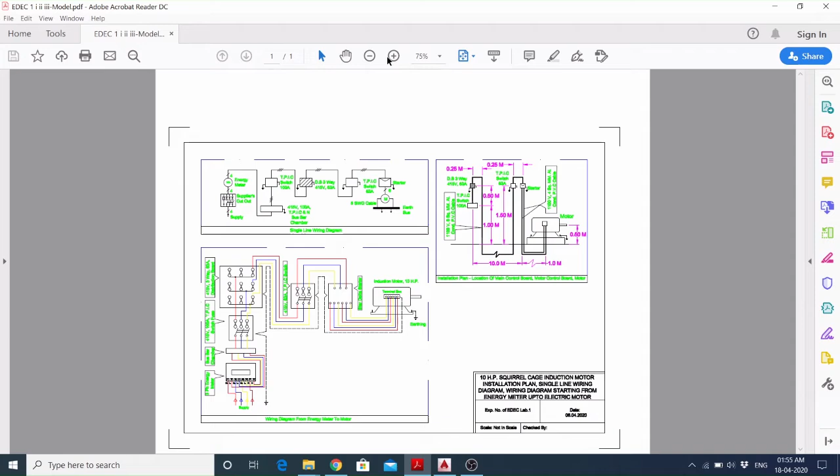Hello, today we will see how to draw the single line wiring diagram of a 10HP squirrel cage induction motor in AutoCAD. Here you can see the single line wiring diagram is already drawn, so we will draw it in AutoCAD.

In AutoCAD, first we will go to Format, then Units. The scale should be in millimeters, and it is already set as default in millimeters, so I will click OK. The shortcut command for units is UN, then enter. Now I will place it OK.

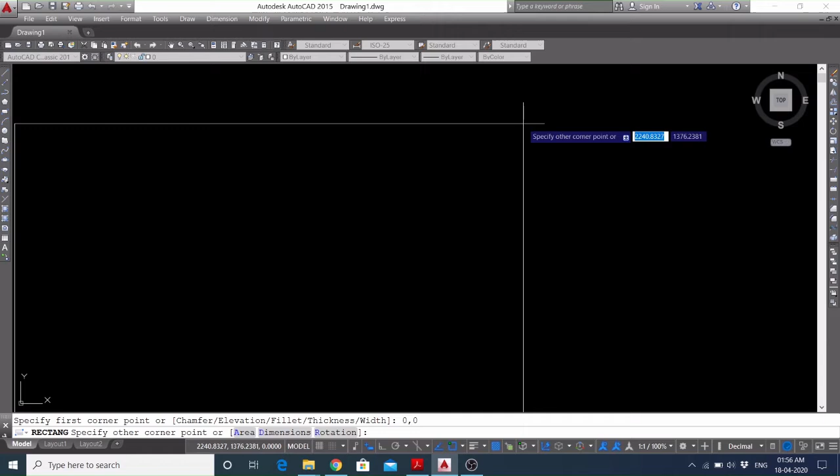Then I will take a rectangle from here, or the shortcut command for rectangle from keyboard is REC, then enter. Now it is asking to start the first corner point. I will mention the coordinate values as 0, tap 0, then enter. The rectangle has started. Now it is asking to specify the other corner point, or to mention the dimensions of the rectangle, so I can also click on dimensions.

Now it's asking for the length of the rectangle. I'll make it 297, then 210. That is the dimension of the A4 page in landscape mode. Now I can zoom it. I'll press OK to go outside the rectangle command.

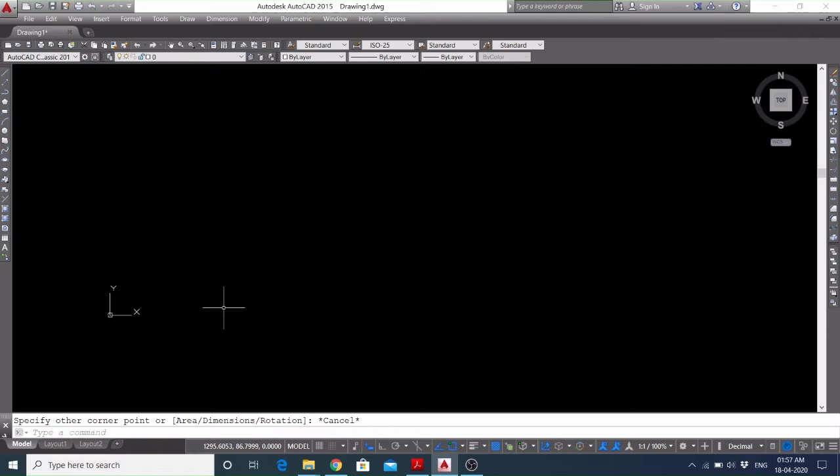Now I will once again take the rectangle command. It will start from 0, tap 0, and then I have to specify the other corner point like 297, tap 210. Now Z enter and A enter, I had already pressed to use the zoom all command here.

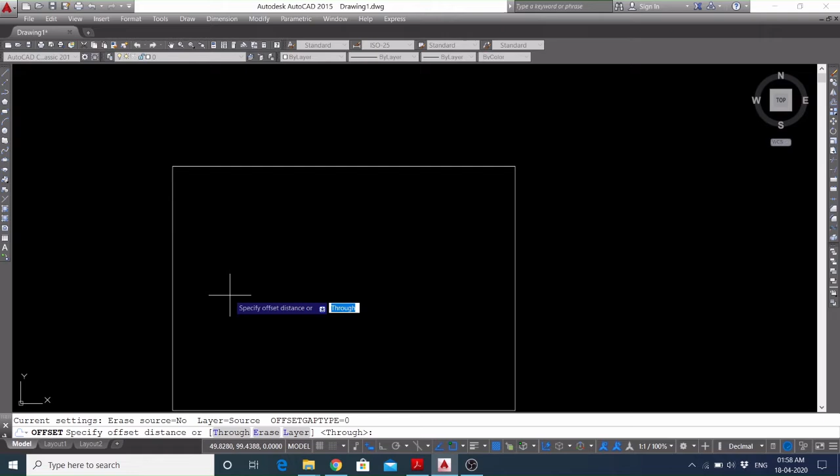Now I will offset it to make a margin. It is asking to specify the offset distance, I will make it 20 millimeters. Now it is asking to select the object to offset, so I'll select it and make it inside the rectangle.

Okay, now I will change the dimension. I will make it 10. Okay, then right click and enter. So the margin has already been drawn.

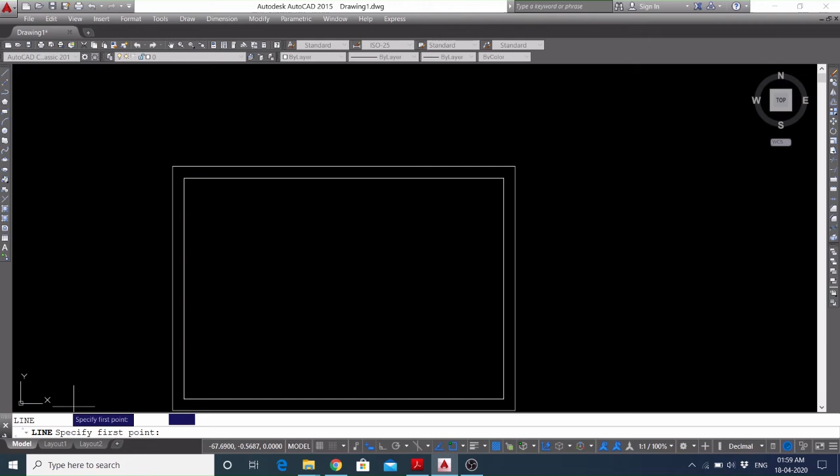Now I will have to draw this single line wiring diagram. This is a line as drawn here, so I'll take the line command, or I can use my keyboard, L enter, to start the line command. Now it is asking to specify the first point, so I will start from 50, tap 60, the coordinates.

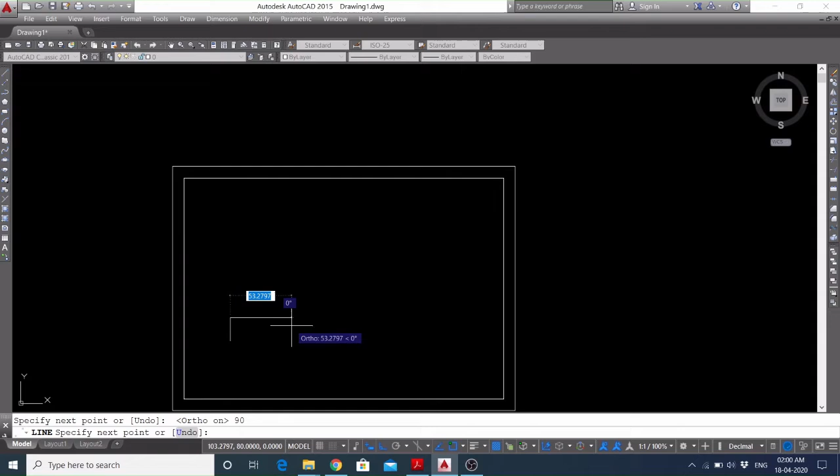So the ortho mode should be on from here, otherwise I can also make it on from keyboard, F8. Now it is asking to specify the next point. So I will make it 20 millimeters long at an angle of 90 degrees. Okay, now escape.

Here you can see there is an arrow to indicate the supply is incoming through this line, so I have to make an arrow. I can use different commands, but now I will use the polyline command, and I will specify the starting point over here.

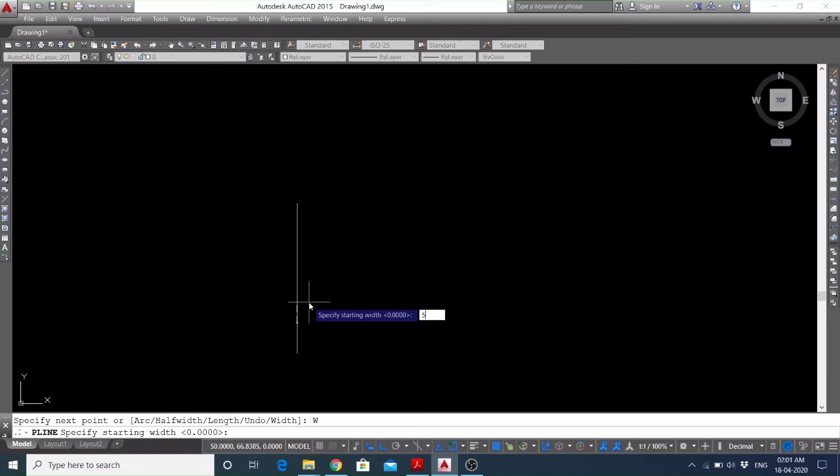Now it is asking to specify the next point or mention the width. So I will mention the width like 5. Enter. Specify the ending width to be 0 to make an arrow. From the mouse I choose the ending point of this line. Now I will use escape to go outside the polyline command. Now the arrow has already been drawn.

Here the other thing is there, like 1 slash, that means one line is there at an angle of near about 45 degrees. So I will draw it outside, like from here I will start and mention the dimension as 5 at an angle of 45 degrees, then escape. Now I will choose it and click on move.

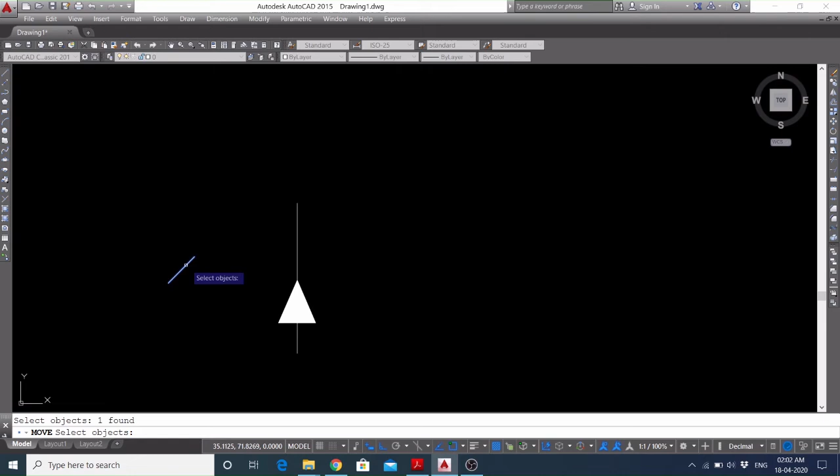The shortcut command for move is M enter. So I will place it from here to here. I want to place this line here, but the midpoint of this line should be placed on here. So I will take the move command. The object selection is done, then enter.

Now it is asking to specify the base point, so I will not click on here, then it will be difficult to place, and the intersection point will not be the midpoint of this line. So I will pick the midpoint and then place it here.

This line which lies in the 45 degree plane basically means that there are some cables or lines there. So how many lines there are, I have to mention with the numeric figure beside the line. So here I have to put the numeric figure.

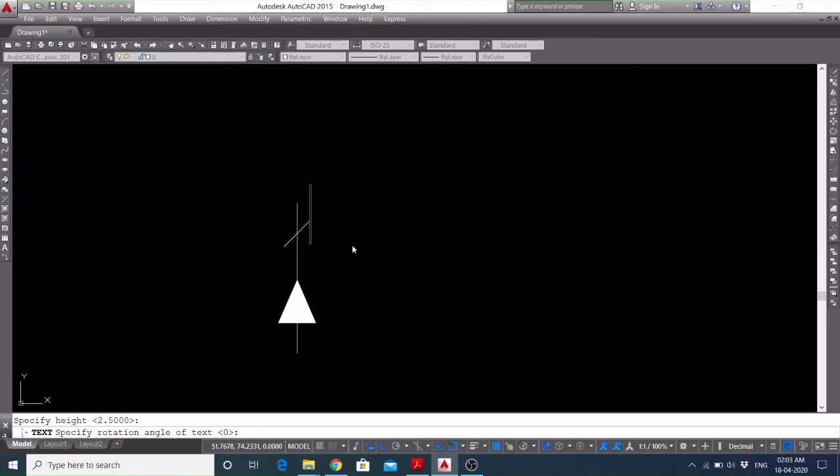I'll put 4. Okay, this is rotated. I will undo it, and then again I will take the text option from the draw toolbox, here, then here to here, 4.

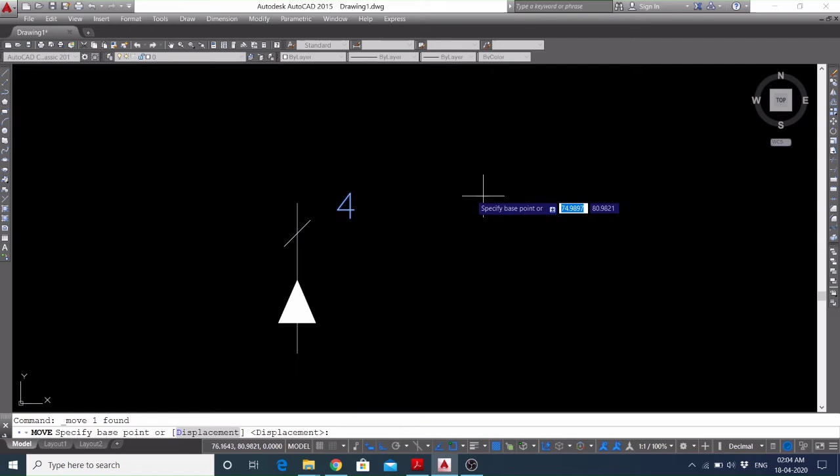Okay, this 4 means there are 4 lines, which is drawn with a single line, as this is a single line wiring diagram. So I will make a line only here, but there are 4 lines I have mentioned like this way. This is a standard rule.

So after that I have to draw a rectangle over here, within which some figures are there to schematically draw the supplier's cutout. So I will take a rectangle from here to 20, tab 10. This would be the dimension.

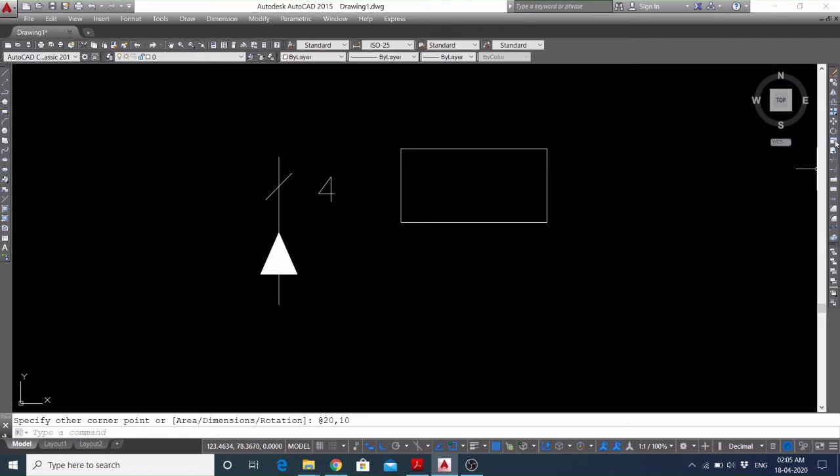I will use the scale command to make it more larger. The object selection is done. Now it is asking to specify the base point. What will be the base point? So I will choose from here.

So it should be 1.5 times more larger, so I made it, and put, by using the move command, I put that rectangle here.

So under this rectangle there should be, this figure should be there. There are 4 lines and like this way.

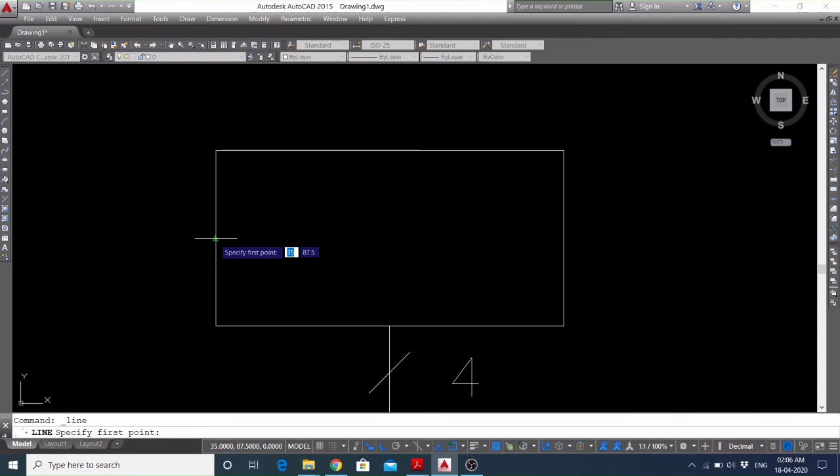I will draw a line here. Now I will use divide command, Div, divide. Object, select the object as selected. Now it is asking to enter the number of segments to draw the 4 lines with an equal space. So I will use 5 number of segments. Segment is 5, then enter.

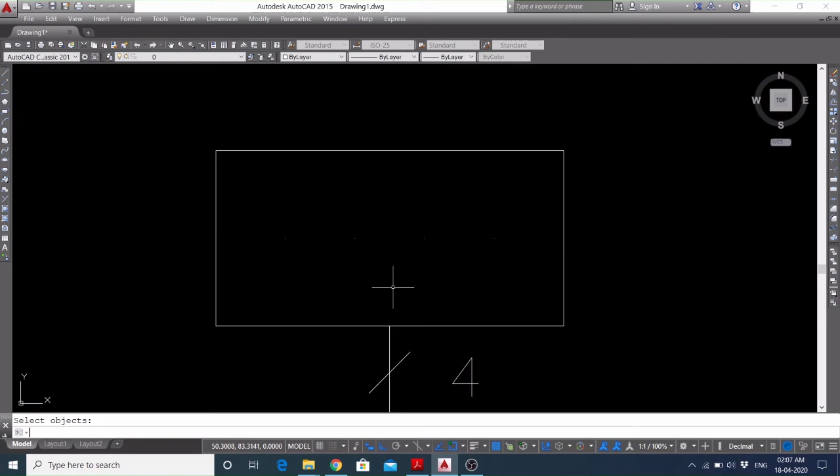Now if I erase this line, you can see that there are some nodes there. I will use this node to draw the lines.

Extend this to, enter. Now I will copy, the shortcut command of the copy is CO, then from here to this node, you can see that the node is highlighted, so like this. Now I can erase these nodes. See what happened here, that these lines are equally spaced.

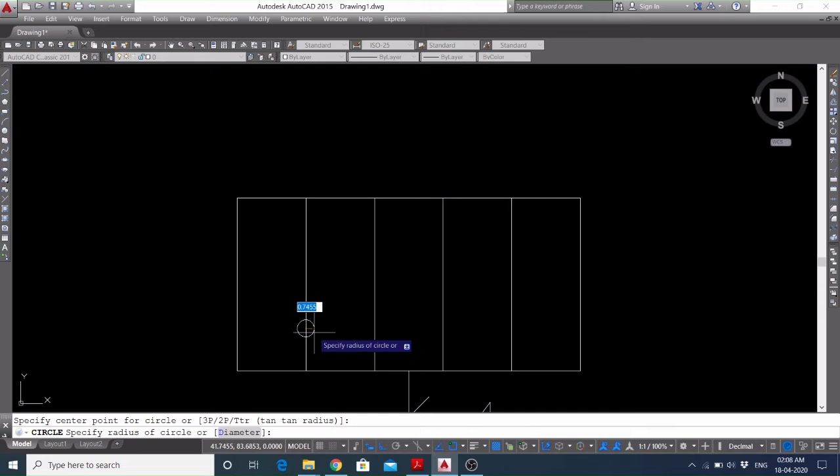Now there are 4 circles, small circles are there, so I will make one circle like from here. What will be the dimension? Now they are asking to specify the radius of the circle, so I will make it as 0.8.

See, it will be visible. So I will place it. I had copied, the copy command is started. So it is asking to specify the base point. So object selection is done, so it is asking to specify the base point.

I'll choose this one to make it easy to place the circles. So specify the second point, this would, and then this one, and then this one. So I have to trim. TR enter is a shortcut command, otherwise you will be able to find out the trim command from here.

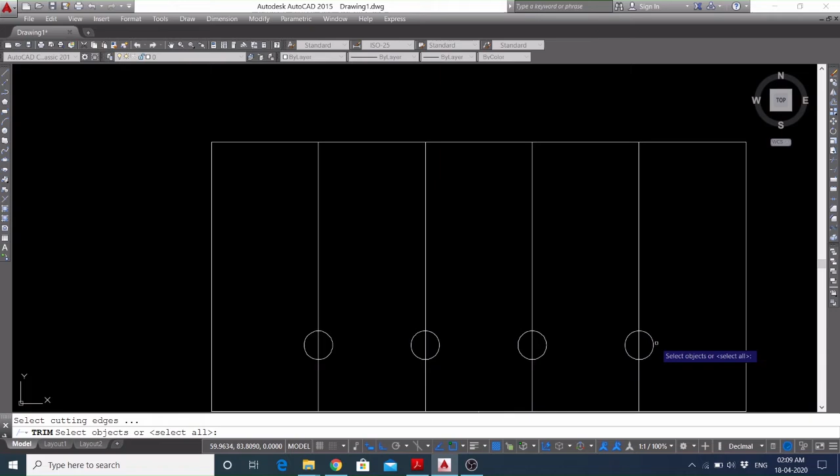So the circles should be selected, then centers be here. Enter. Then there are 2 circles. So I will just copy.

Selection, copy, from here to here and here. Okay, so I will again use the trim command from here to here, then yeah, okay, again trim.

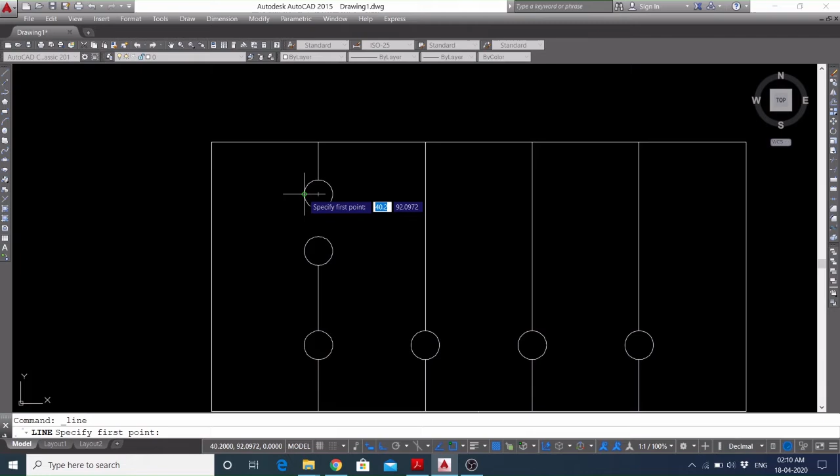Now I will draw the line from this quadrant to quadrant, again quadrant to quadrant. Okay, fine. Then the same circles.

Copy, base point should be here. Then if I choose here, then also I will be able to place here, right here to perpendicular to this, then perpendicular to this, and then perpendicular to this.

Okay, see, if I choose this copy and then from here, then I will not be able to place in proper location. Okay, see, I will not be able to place at the center. This center point of the circle will not be placed properly on this line.

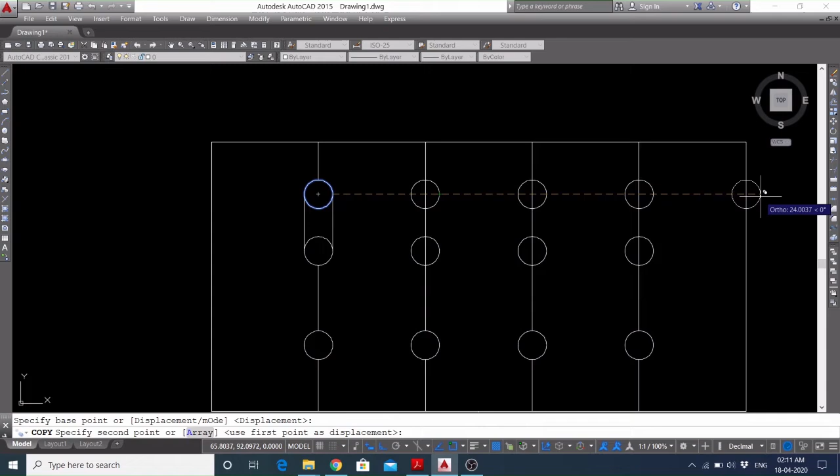So whenever you will move or copy, or whenever you will draw something, you have to keep in mind what would be the best base point to move or copy or to use the commands.

Okay, so again I will use trim command here. I will choose from here to here. Okay, so this and this.

Okay, this is a single object, so I have to use erase command. Trim command can only be used with a reference point, but the line was here, right? So there are no reference point to trim, so this is a single object, so I have to use erase command. Now I will draw the line, but from where?

I will use tangent. So TAN, enter, again TAN, enter. Tangent to tangent of those circles at the first point and the end point of this line.

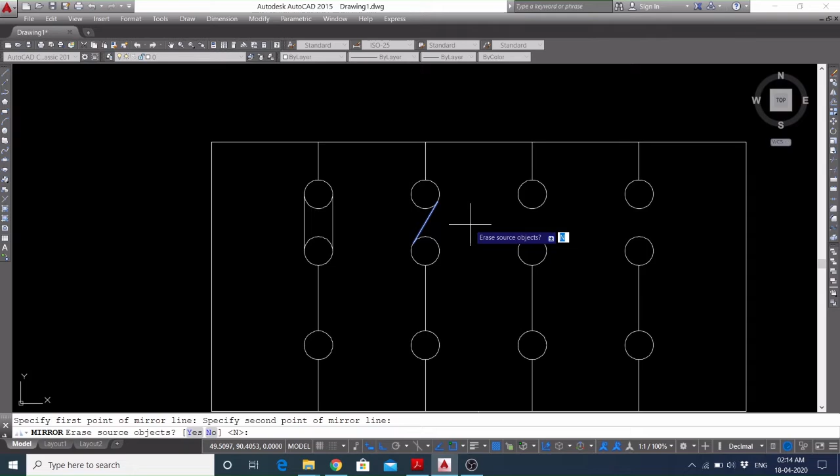So this will be the first point of the mirror line, and this will be the second point of the mirror line. Now it is asking to erase source objects. No. Then enter. So both lines are there, so I will use copy, then from center to center.

So the lines are drawn. Now I have to place this switch, to make this cut out I have to draw these lines, so I will erase these lines. I will not erase this line. I will erase these two lines.

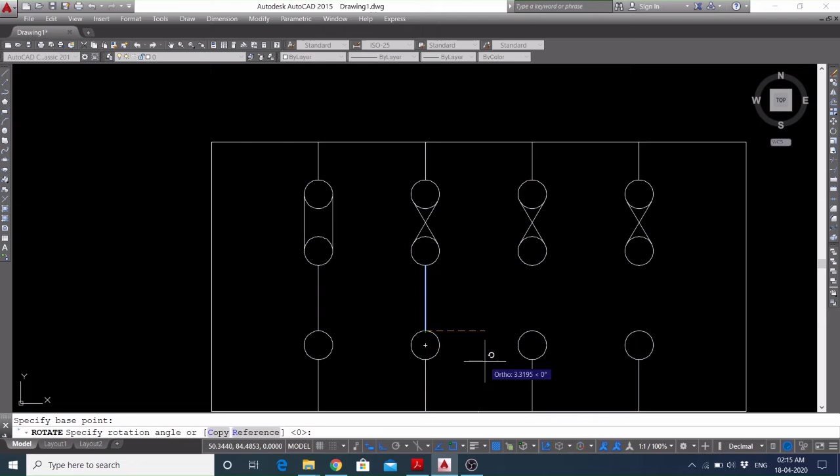Now I will use rotate. The object selection done, then right click, then specify the base point. The base point is this one. Now what would be the angle? Minus 45. Enter.

Now I will copy this one from here to here, then now I will draw a line from midpoint to midpoint.

Then offset, distance would be 4 millimeter. Okay, 4 millimeter is quite high, so here I have to use 1. Enter. That is also okay.

I will use this one, then 0.5, then object selection here. I will use extend. Trim.

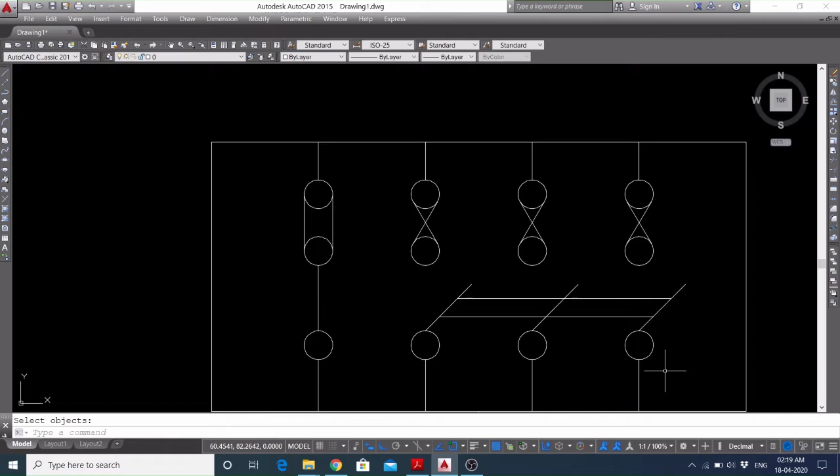Now I will erase the middle lines. So this is drawn complete.

Again in this one I have to copy. I'll use the move command, pick the center point to the midpoint of this, midpoint to midpoint of those lines.

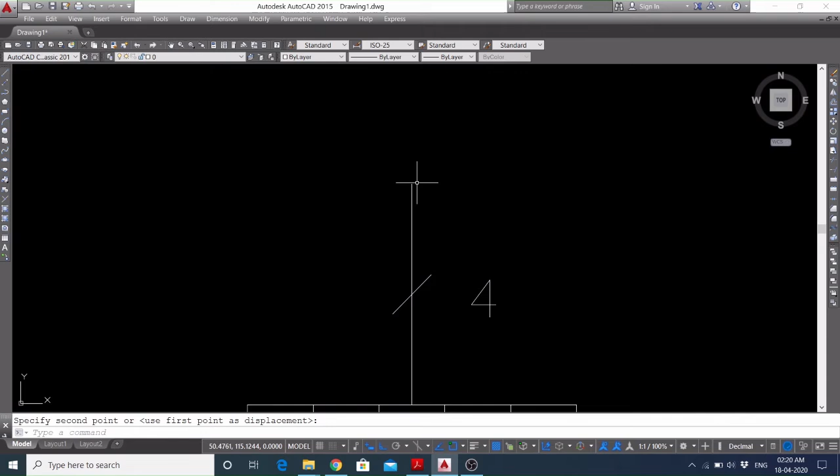So now I have to draw a circle, from here I will take the base point so that it will keep it aligned with the center point, aligned with this line. The radius of this circle would be 10.

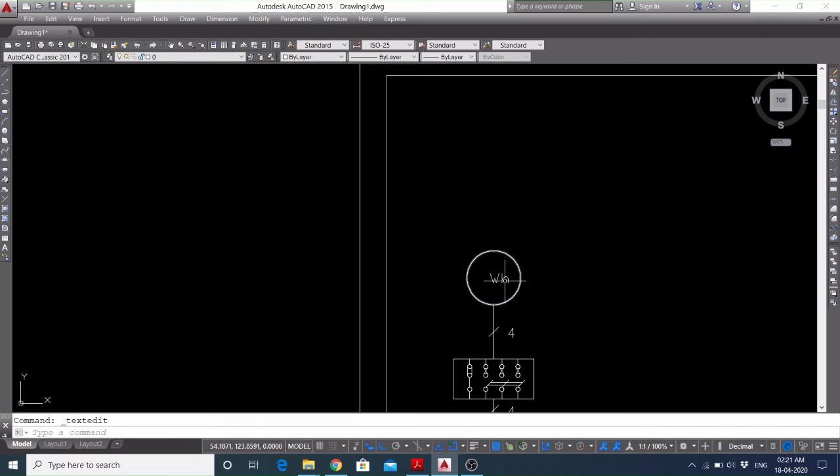Move command here, then again the same thing is there. That means the 4 cables are going from here to there. Output of the energy meter, there are also 4 cables, and input at the energy meter is also 4 cables. So then it will run, and then it will drop to the bottom, and then it will enter here at the TPIC and neutral.

Triple pole ironclad, TPIC, the full form of TPIC is triple pole ironclad with neutral. So 4 lines should be there. These 4 lines mean 3 phase wires and a neutral wire. This bus chamber should be drawn.

I will just make a copy of this and keep ortho mode on, so I will just place it over here, then from here I will randomly draw.

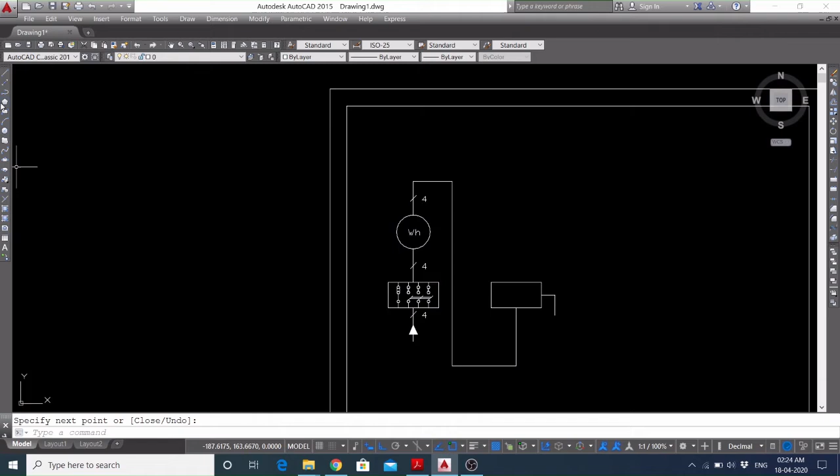So I have to draw the earthing. Go from here to here, then I will copy this line from mid to this, then.

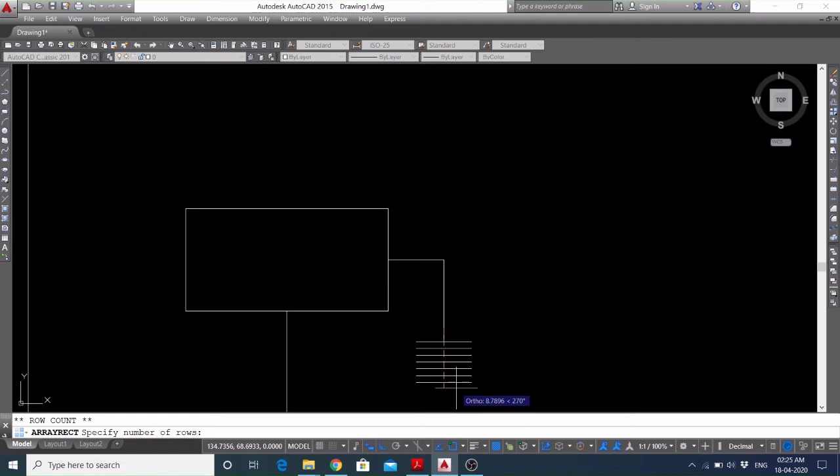Rectangular array, select object, enter. The number of columns would be 1. Direction would be like this.

Then enter. Now I will draw the 2 lines, then trim, enter. Fence, I will take the fence command and draw an imaginary line.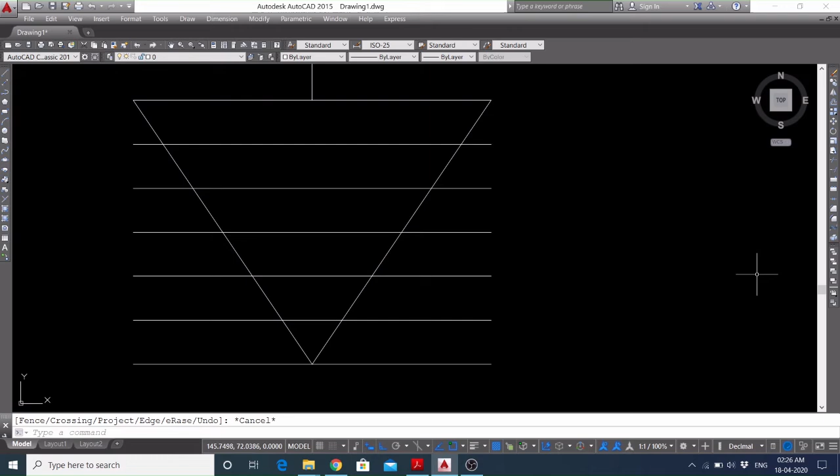Sorry, the trim command will not work over here because now these 1 2 3 4 5 6 7 lines are treated as one single object, so I have to use the explode command. Explode command is already used, so all the lines are now separated. So I will use trim, then fence.

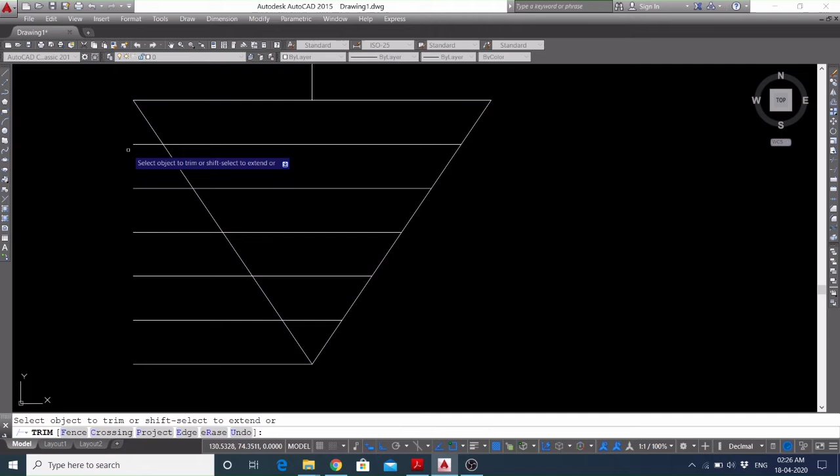Now using this fence command, it automatically takes all the lines which are there with the imaginary fence lines. So whatever objects are there when the fence lines are drawn, all of those will be trimmed. And now I will use the erase command, again to erase these things.

Okay, now from there just copy from there to here.

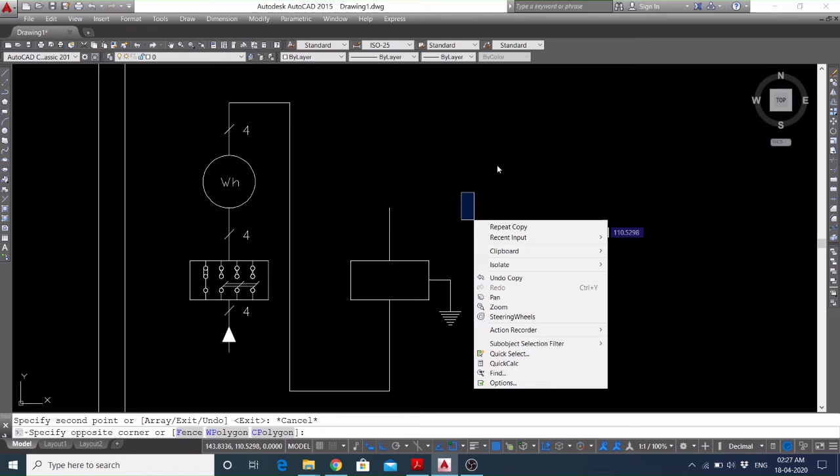So you can see that there are 3 lines placed at an angle of 45 degrees to indicate that there are 3 phases, or you can say 3 cables or 3 wires are there. So you can either mention it this way, or you can mention it like this way.

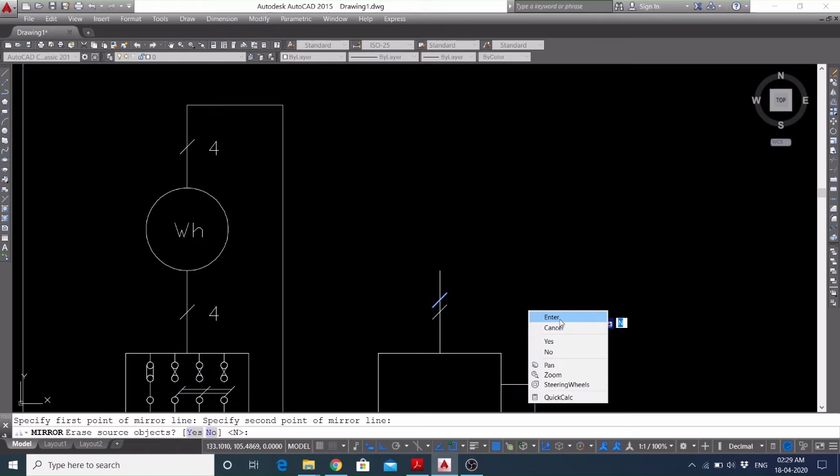So I will just copy it from here, then here. I will copy it once again from there to here, and then mirror. Now the TPIC switch box.

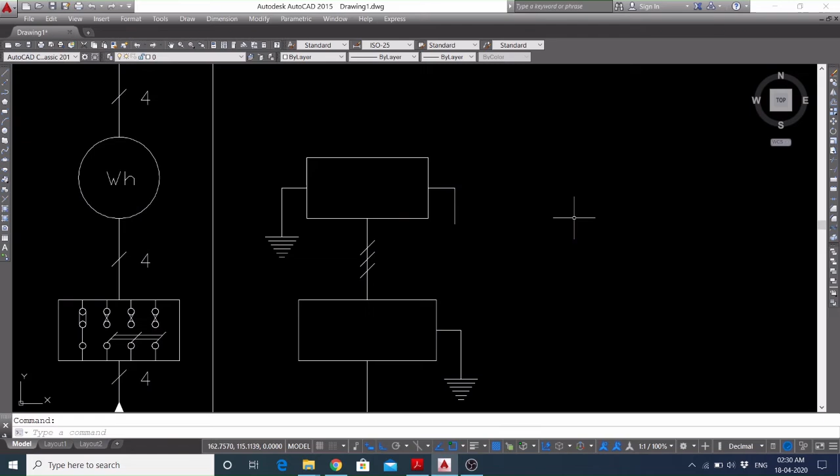Okay, I will save it now. Desktop. HP induction motor.

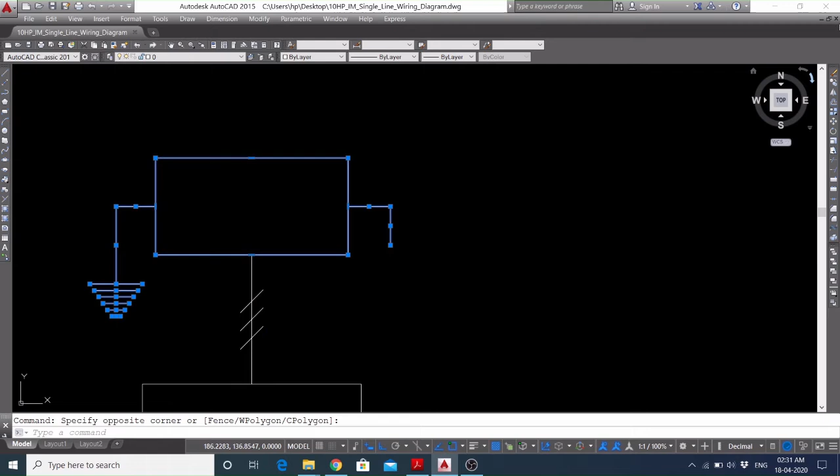Then I'll place the same thing here as DB box. So I will just copy it. Copy and then I'll place it from here to here.

Okay, I will just make a copy of this to this. Okay, then the center to this, equal distance there.

Okay, then copy from here to here. Extend, frame, okay.

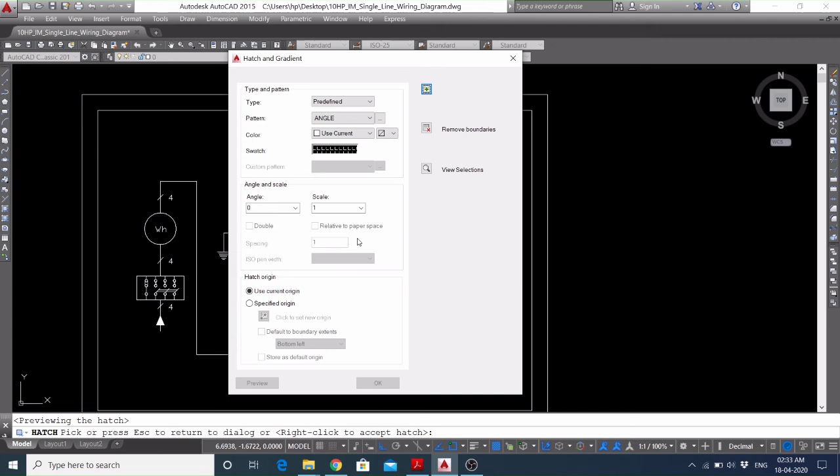Preview is this. Okay, now I have to change the pattern. So I can change it from here or okay, so again, preview.

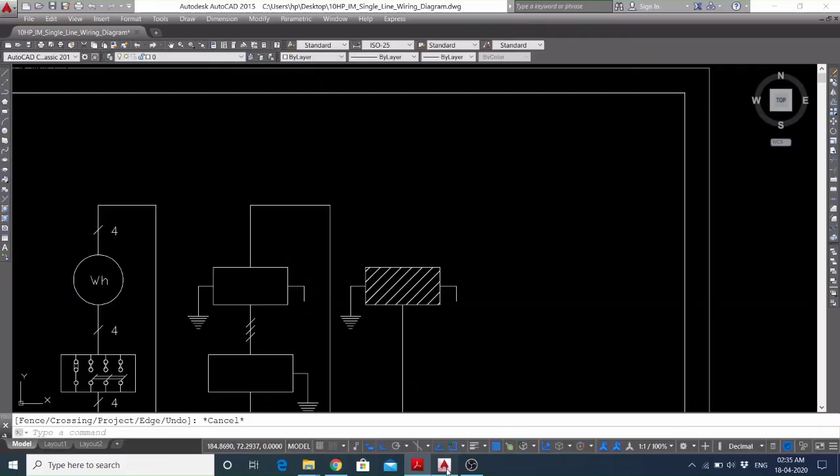Then copy this here to here.

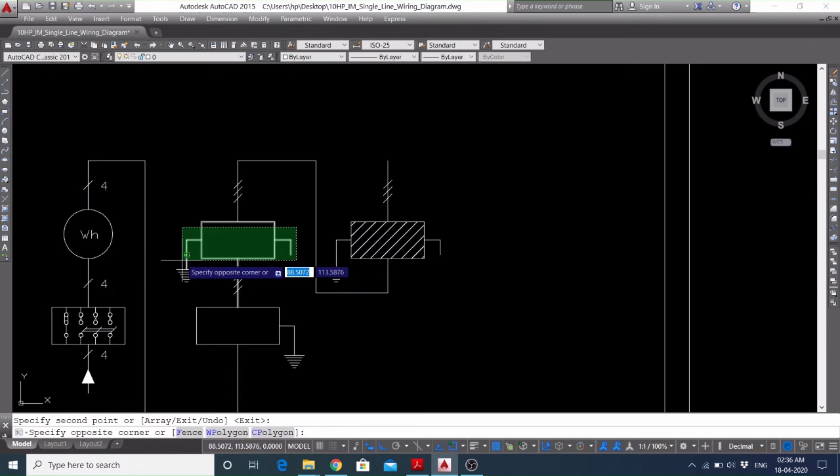With this, with yeah, okay, then again TPIC switch to copy all these things.

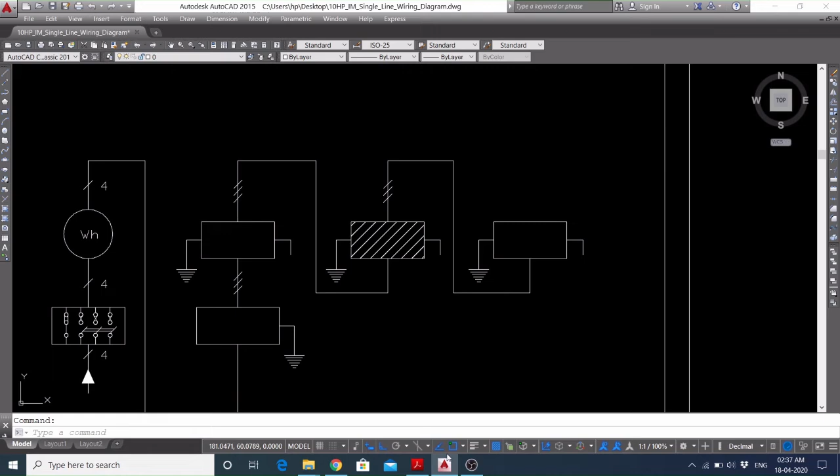This TPIC switch. So okay, TPIC switch, then we start it. Complete the whole thing, then

rest here. Now I have to draw the starter. Okay, now from there to

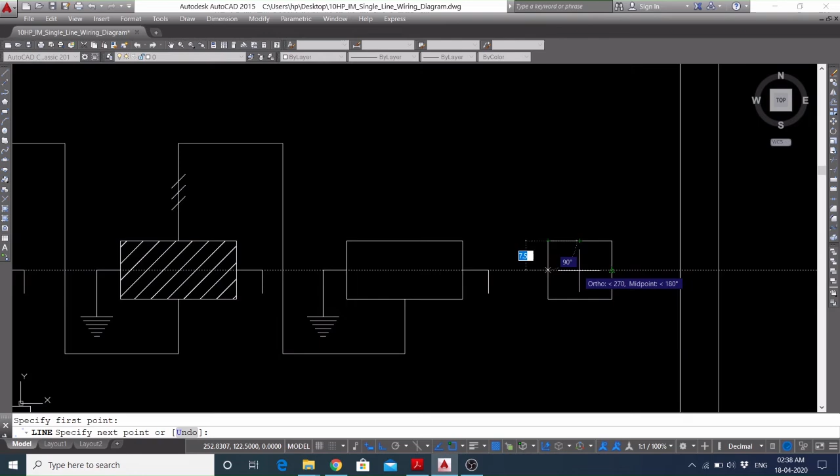Then that thing, copy it.

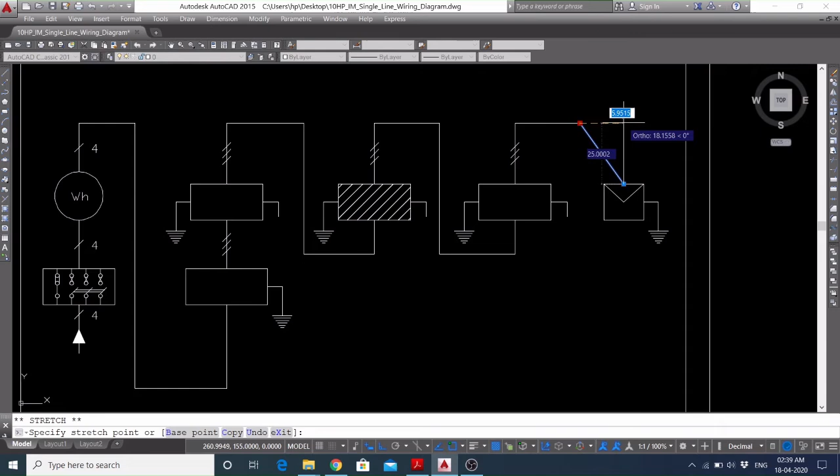See, there are 3 lines which are entering in the starter. From the starter there are 6 lines going out from here. So okay, from there to draw here, like okay, copy from here to here.

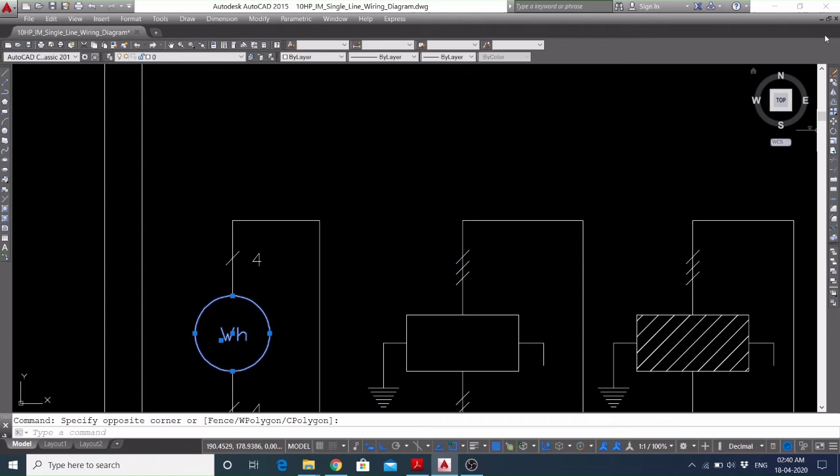6 lines are going out right from here. So the motor is there, so I will again copy this one, copy from here. Okay. Mid of this should be written as M.

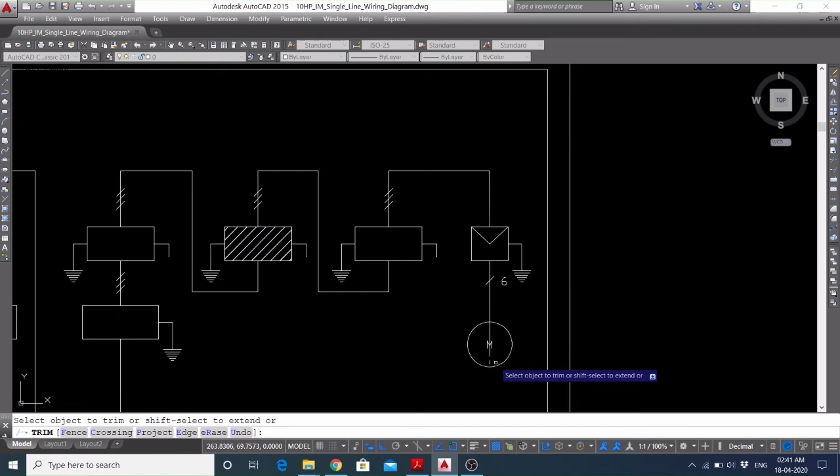I will just simply move this a little bit upward, then trim here, trim, yes.

So motor is drawn, then there's a thickened line there, so I will use PL, enter, specify the start point. Okay, width of the line would be 20, then again 20 would be the ending line.

So okay, I can change it and make it 5. So this is better, so I'll place it in the middle of this with the midpoint, MID. Okay, to perpendicular of this.

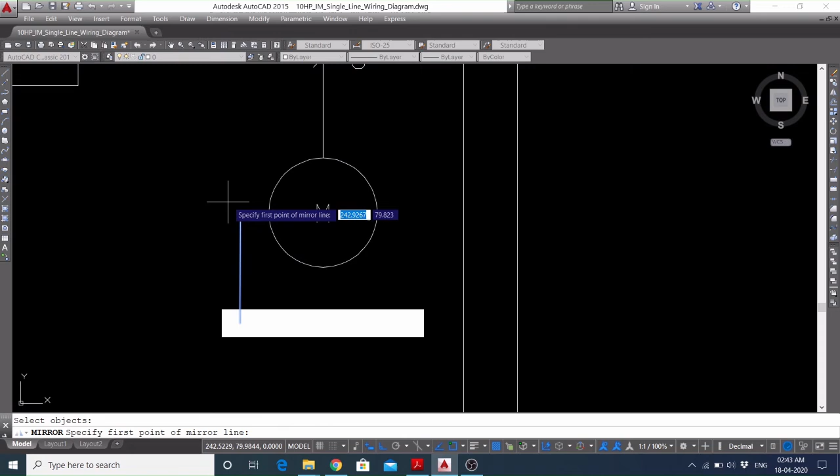And now I have to draw 2 lines. And mirror, selection object. Okay, and then the part should be shown. So copy it here.

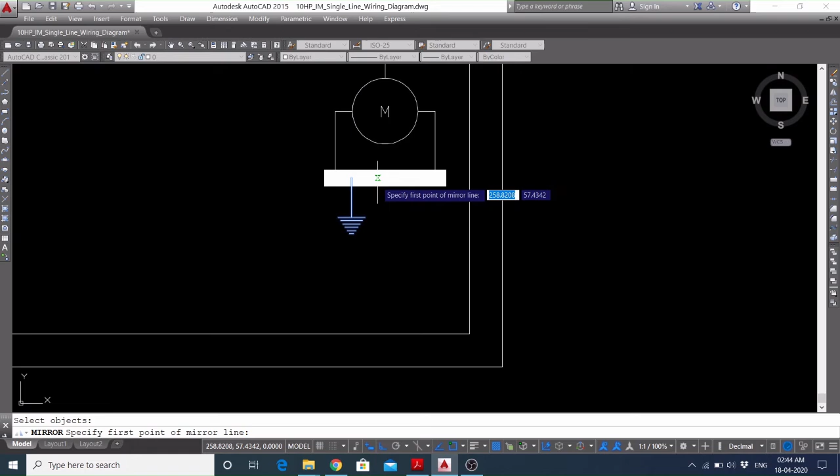Mirror, midpoint of this polyline is this one. So this is drawn. Okay, down this one.

Okay, now I will lift the complete drawing, it will build upward. Now I have to write the text. So

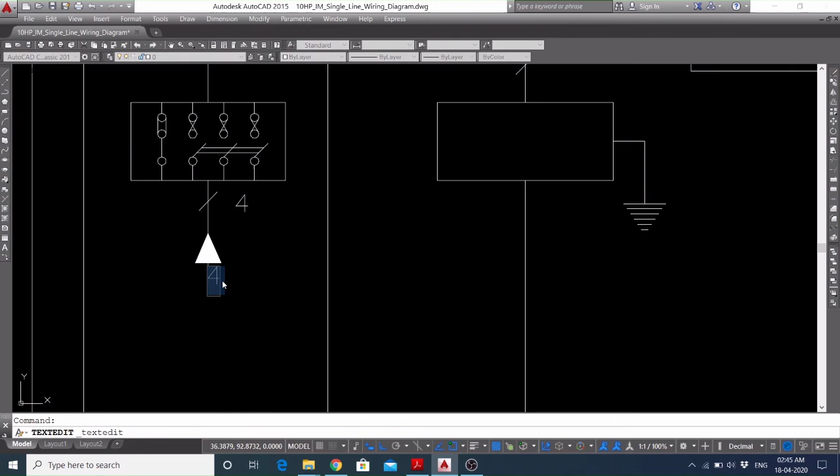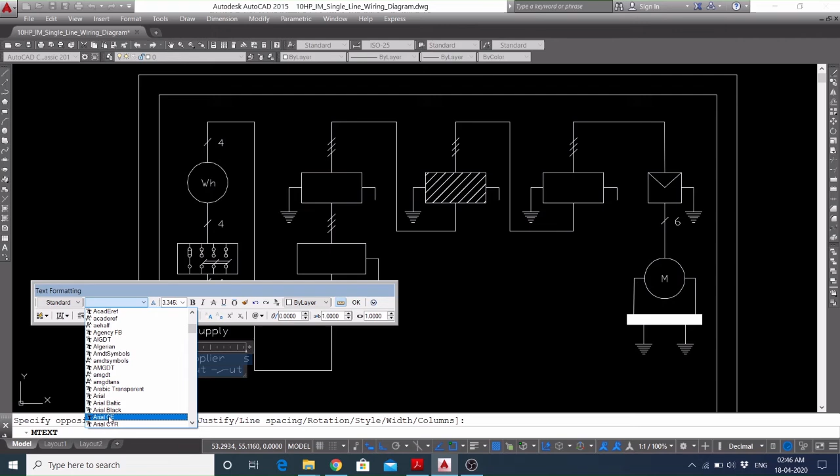You can change the font, like I will choose Arial. Okay, so I will rotate it like this, and this one also can also be changed. Okay, so I will change it here to modify from their properties. Then

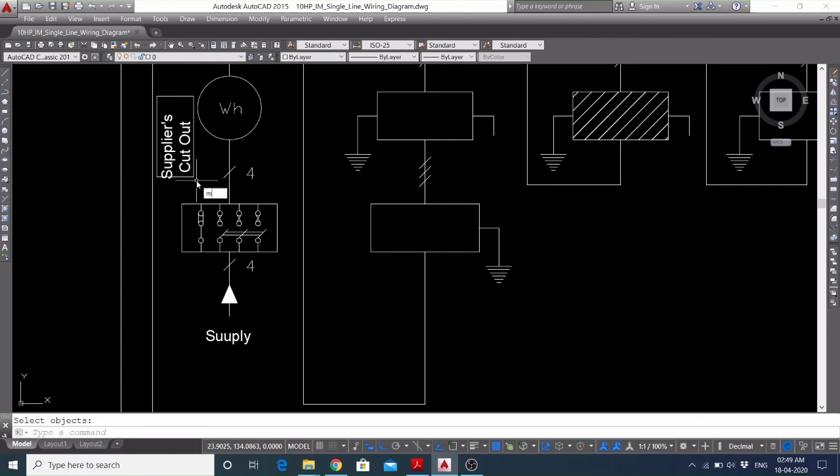To move the last object, that means to select the last object which you had selected, so you can use the L command to indicate the last one.

Snap is on. Supplier's cut out. Then energy meter.

So copy this one from here to here. Okay. We'll do the same thing. Copy from here to there.

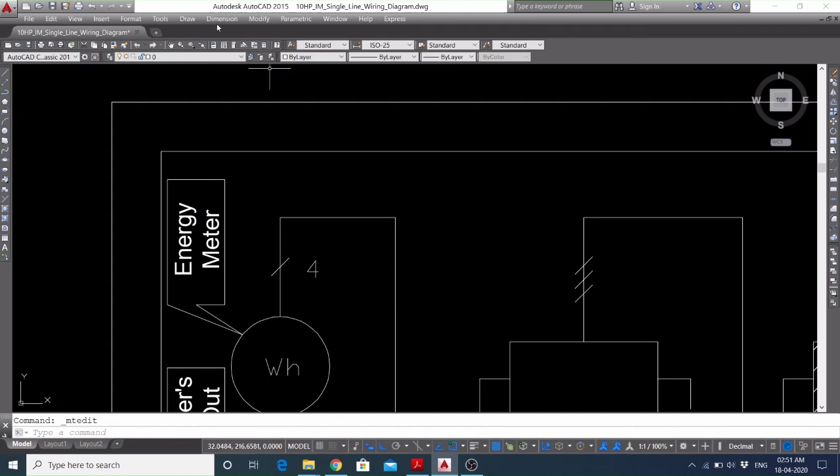Energy meter, then okay. After the energy meter, TPIC switch of 100 amps and 415 volt 100 ampere TPIC with neutral busbar chamber.

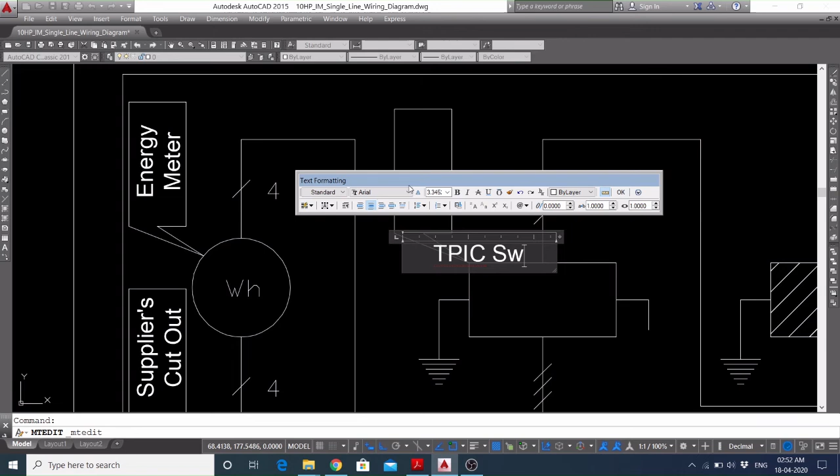TPIC switch 100 amps. Okay, then copy from there.

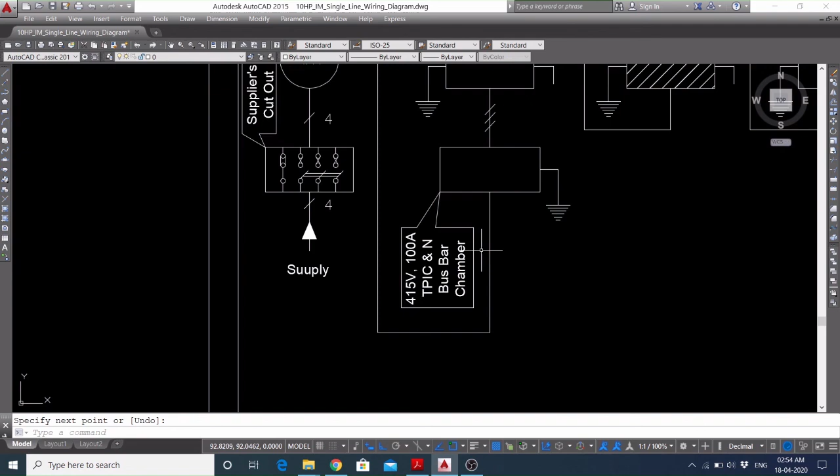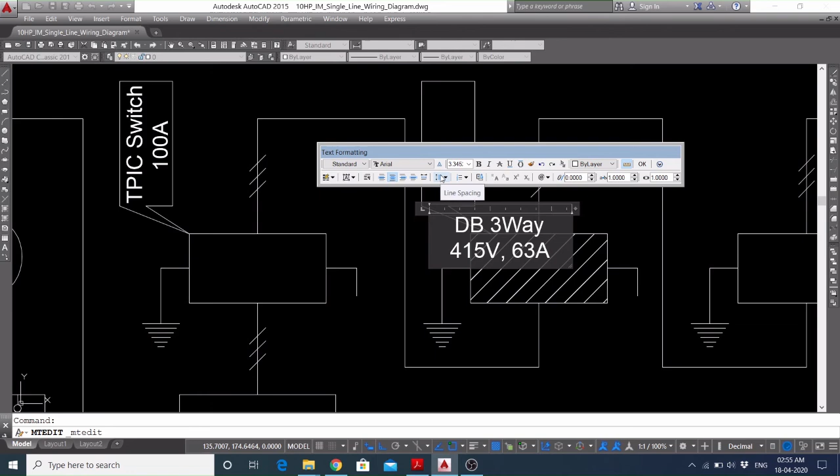DB 3 Way 415 volt 63 ampere. And then TPIC switch of 63 amps.

So just copy it from this base point to this. Then I will edit the text, only 63 amps instead of 100 amps. So from there, 8 SWG standard wire gauge cable.

SWG cable, then TPIC switch of 63 amps is done, so I have to write starter and earth bus. So

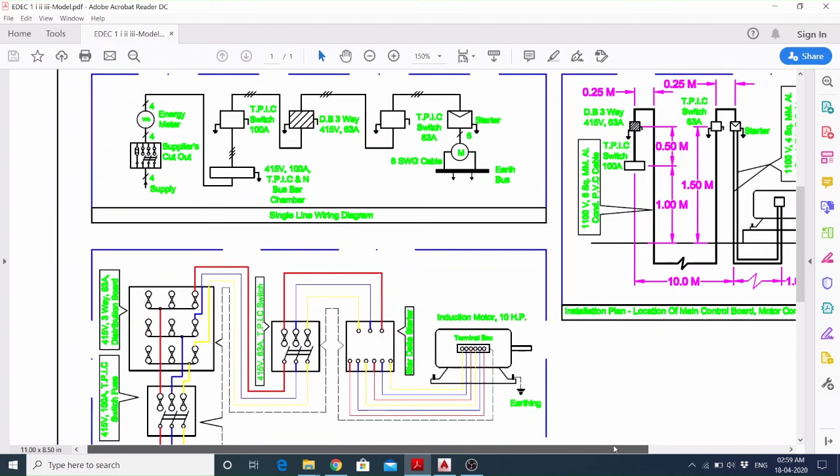This no need to write, I will just make a nameplate randomly. So

I will draw a line there, here, then offset to offset. Okay, then I have to write something over here, so copy, paste.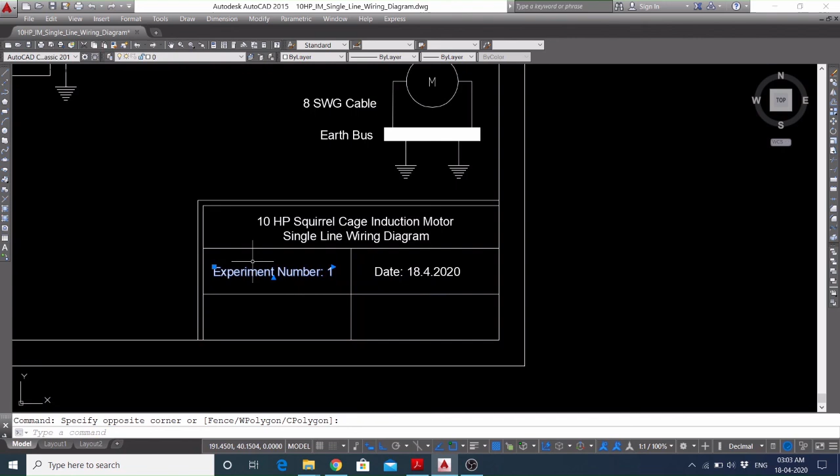Copy here, here. Because these figures are not drawn with the actual scale, dimensions, so these are basically not in scale, so and checked by

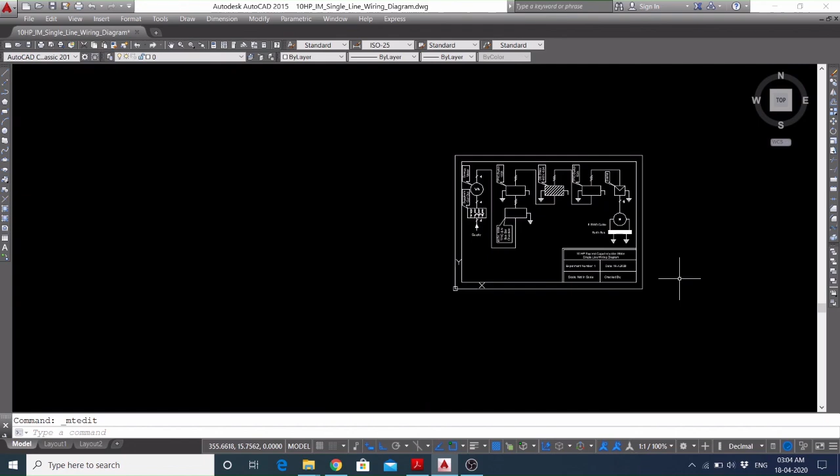We will use the regen command. Also we will be able to use view res command. Okay, so do you want to fast zooms? Yes. And the circle zoom percent is 20,000.

Again I saved it from Control S, that is a shortcut command save from keyboard. So that run is completed. Needs to be shifted basically. Okay, now it looks okay.

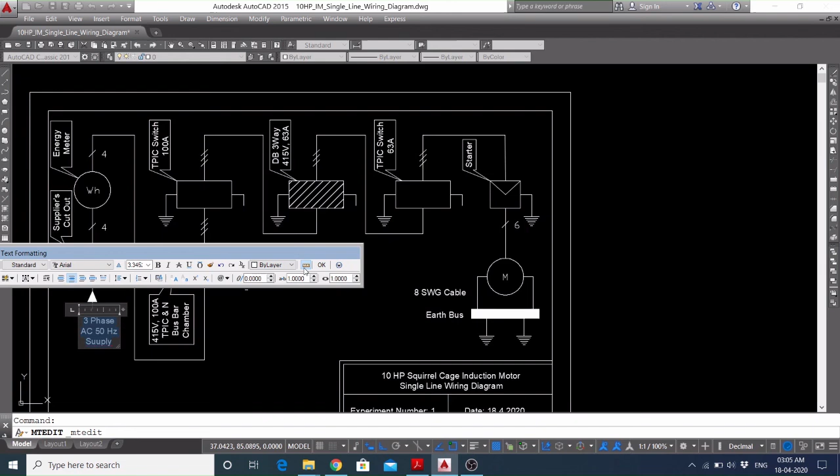So okay, our 10HP Squirrel cage induction motor single line wiring diagram is already drawn.